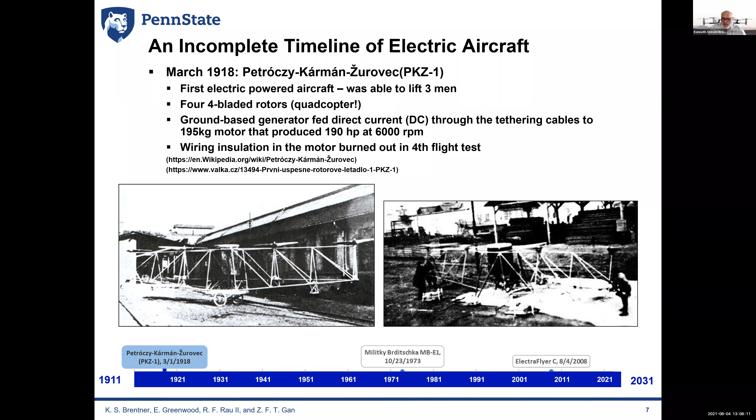The first electric aircraft was quite interesting to me. This is the correct picture for the PKZ-1. Theodore von Karman was there. This is the first electric aircraft. It was an observation craft to replace balloons. It was able to lift three men, and it was a quadcopter with four-bladed rotors. Here you can see them. I don't think it ever flew very high, but it flew four times. It had a 190 horsepower motor, and eventually that motor burned up, since they were trying to make it light. So it's kind of cool to me that the first electric aircraft was a quadcopter.

Now, it was quite a long time before any progress in electric aircraft was made. But in 1973 - I'm not going to try to pronounce these names, so I'll just call it the MB-E1 - this was a full-size manned aircraft, solely electric powered with nickel cadmium batteries at the time. It could fly up to 12 minutes, and in 2017 it was restored. Again, it was quite a long time before much else happened.

The next thing was in 2008 at Oshkosh, the ElectraFlyer C flew. In the press, I noted that it was titled 'Quietly Wows the Oshkosh Crowd.' This was an electric aircraft that had a battery which could be charged in as little as two hours, flew 70 miles an hour, up to two hours. So that was quite an achievement with this aircraft.

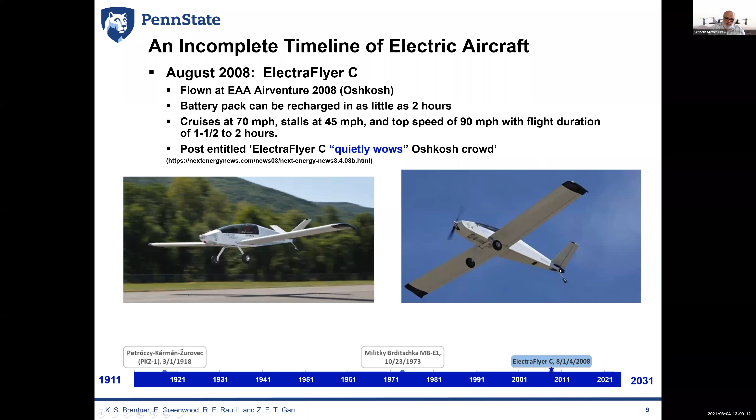But then I want to focus on the last decade. This is where really things start picking up, and you know there's going to be things happening. Remember that companies were starting to be founded, like Joby and Zee, just a little bit before 2011, which is what I'm showing here.

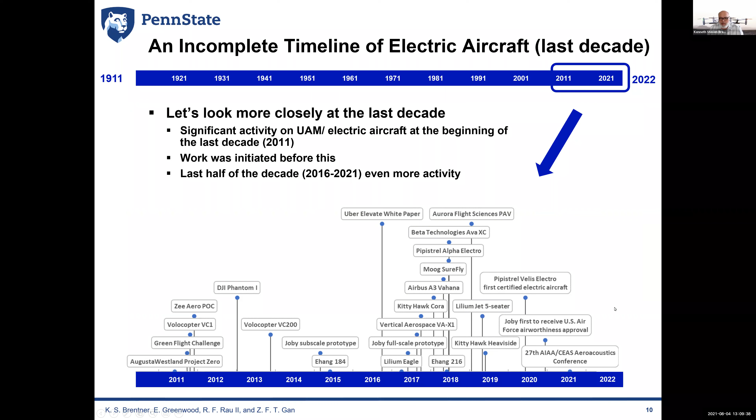So I want to look at these in more detail. Really, I would say AugustaWestland's Project Zero in June of 2011 was quite important. It was a hybrid tilt rotor lift fan aircraft, meant to demonstrate the technology. It wasn't intended to really fly, but it did hover, and it's the first electric tilt rotor aircraft. Very cool looking, an important milestone to make people start thinking about this.

Another very major milestone, I think, was in 2011, the Green Flight Challenge. It was sponsored by Google, and the requirements were for an aircraft to fly 200 miles in less than two hours, nonstop, using less than the equivalent of one gallon of fuel - so less energy. There were a couple of successful aircraft, but the first place winner was the Pipistrel Taurus, by Langelaan LLC. This is Jack Langelaan, one of my colleagues at Penn State. It would have been a Penn State aircraft, except Penn State didn't want to do the liability, so he formed his own company to do this. But it was quite an achievement for this aircraft, and really was looking forward.

403.5 passenger miles per gallon. They put two gliders together.

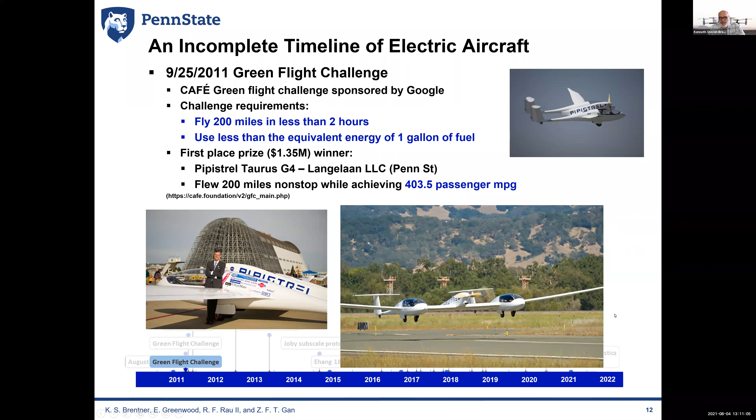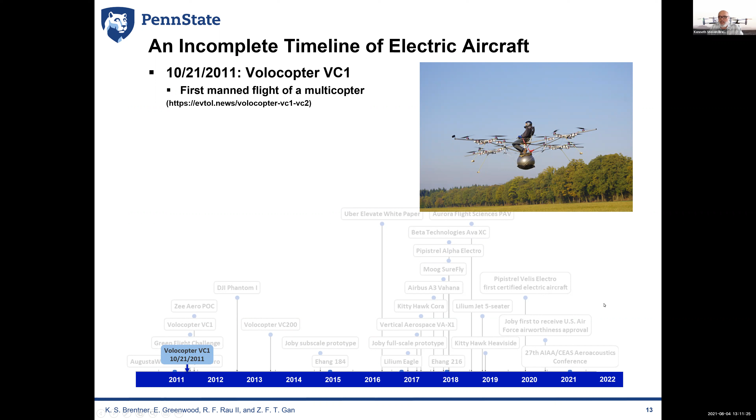Then just a few weeks later, the Volocopter had the first manned flight of a multi-copter. You've probably all seen this picture - quite impressive. Just to start, I love the exercise ball, or Pilates ball, used for cushion.

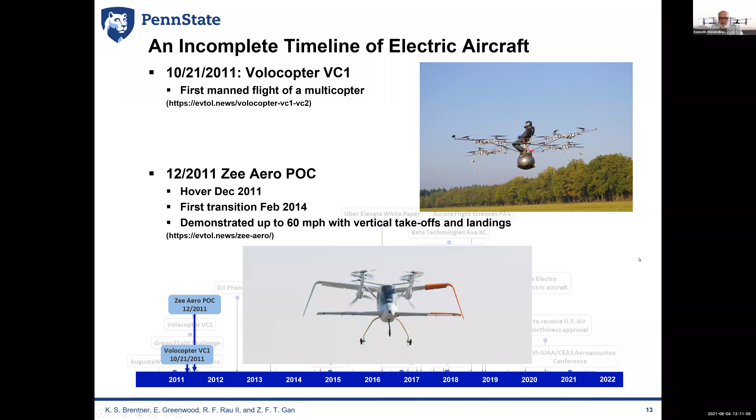Then just a few months later, Zee had the first flight of their proof of concept vehicle - Zee being Mark Moore's crew out of Stanford's... well, their company. This aircraft transitioned in 2014, and this eventually led to the Cora, Kitty Hawk. I know that they were using sophisticated tools even for noise back then.

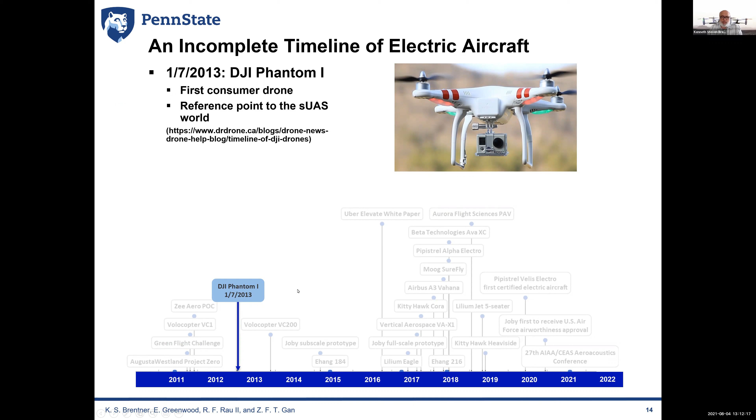Just as a reference point, I thought it was interesting that in the small UAS drone world, the DJI Phantom, which is quite famous, was the first consumer drone. That only happened in January of 2013, so that's not even been 10 years.

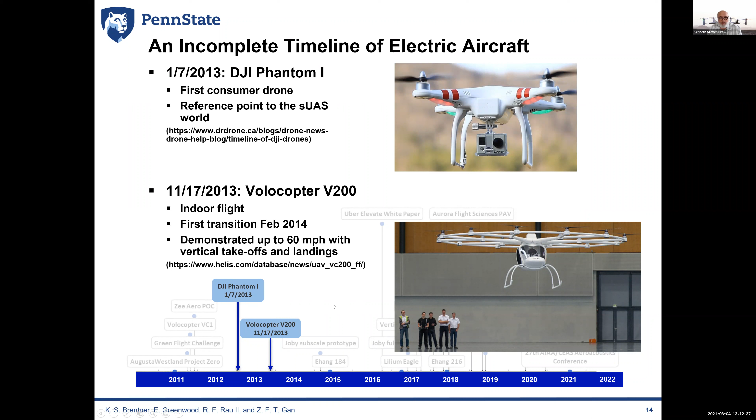Then later that year, towards the end, the first indoor flight of the Volocopter V200, which we recognize. It was flown inside, and it transitioned in February 2014 and can do 60 miles an hour with vertical takeoff and landing.

A few years later, Joby was testing their subscale prototype. Of course, no one knew about this at the time. Joby released this later, but here you can see it, and it's appropriately dark because they were very tight-lipped about what they were doing.

Same time period, EHang was flying their 184 with passengers. This 184 has 4 arms on it, so 8 rotors.

Then in 2016, almost a year later, a milestone I think was the Uber Elevate white paper. Uber started really, I'll call it evangelizing. Mark Moore, I would consider an evangelist, a strong technical person, and that was an important milestone for the whole industry in this movement.

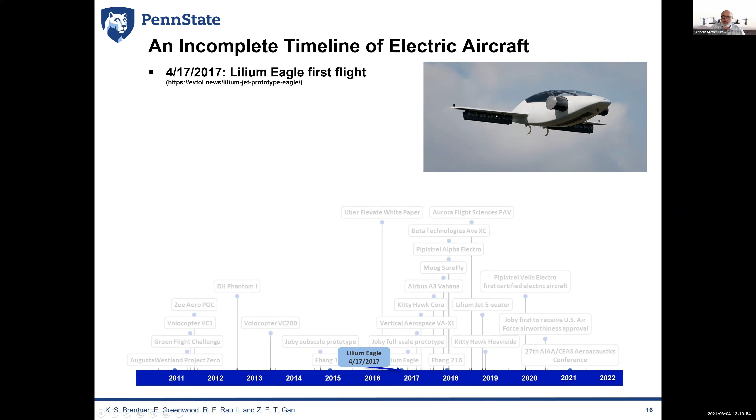So then Lilium enters the stage. They'd been working on stuff, and they had their first flight of their Eagle prototype. It's a smaller aircraft, starting to demonstrate their ducted fan idea.

In that time period, Kitty Hawk Cora, which proceeded from Zero, was in flight testing, I think in California, but mostly in New Zealand. And nobody knew about it.

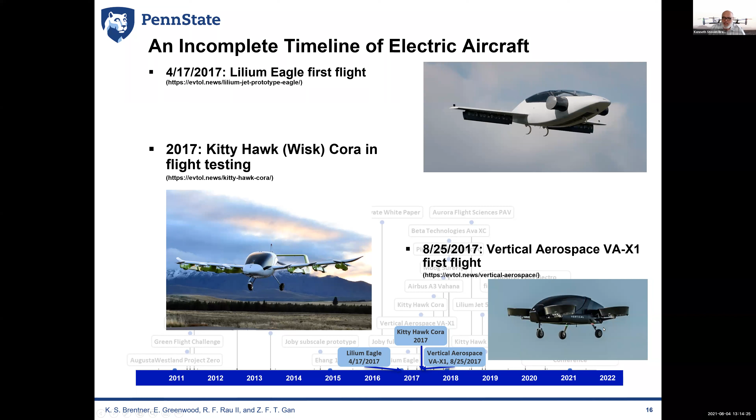Then across the pond in England, Vertical Aerospace was flying their first prototype of a ducted rotor system. And lots of activity starting up here in 2018.

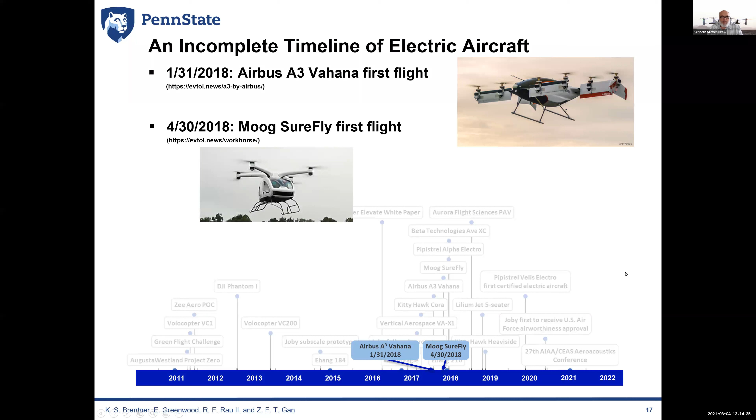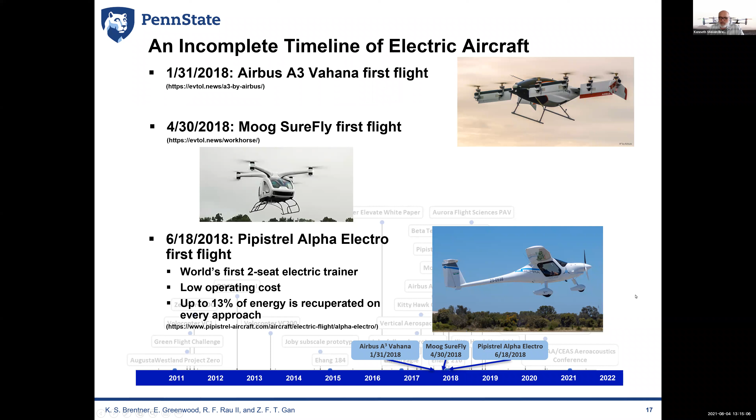Vahana had its first flight. The Moog, or it was Workhorse, the Surefly had its first flight. And then I put in another conventional aircraft I think is significant, the first flight of the Pipistrel Alpha Electro. This was a 2-seater trainer, providing low cost. I think it's quite interesting that it recovers 13% of the energy on every approach, so it could sustain the flight time.

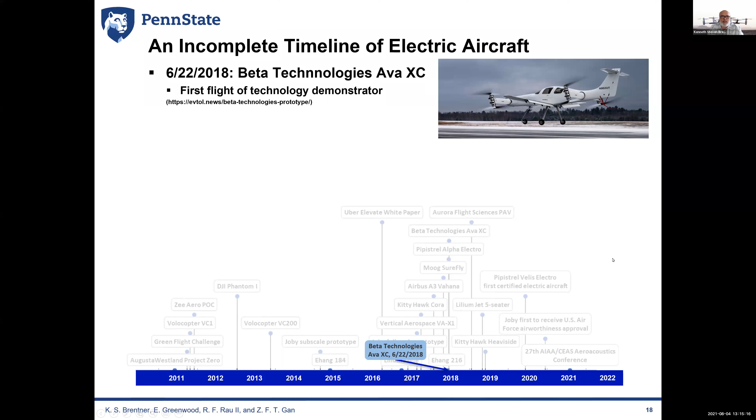Then in June of 2018, Beta Technologies flew their first demonstrator, the AVA-XC. The EHang 216, with 8 arms, 16 rotors, can travel 8.8 kilometers on a single trip, it says.

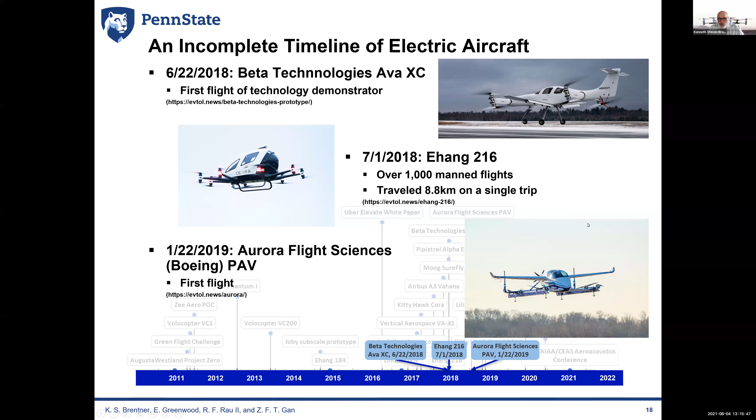Also at the beginning of 2019, the Aurora Flight Sciences PAV, personal air or passenger air vehicle, I forget—Boeing bought them. Then Lilium had a 5-seater that they tested in 2019, their first with all 36 ducted fans.

It was tested untethered. Kitty Hawk Heaviside—they've got a new vehicle that came out in 2019. They have over 237 successful transitions, 100 miles on a single charge, 180 miles per hour. Quite an efficient aircraft. Again, they were working towards low noise and claim 38 decibels in flight.

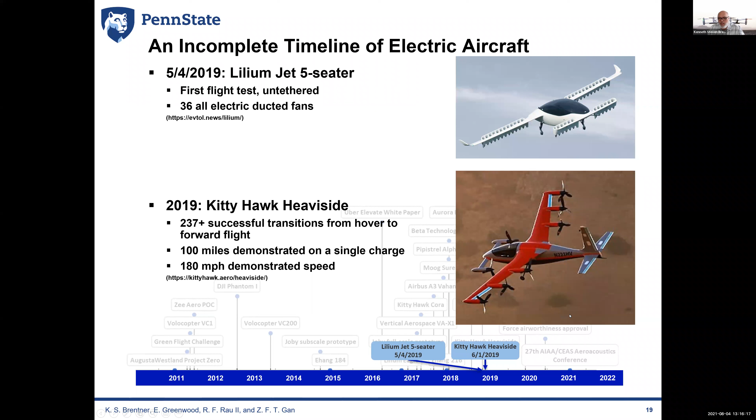Joby was the first to receive US Air Force airworthiness approval as part of Agility Prime. But Beta in May of this year, with their Hexa vehicle—lift aircraft—and Kitty Hawk Heaviside have all achieved this certification. And so that brings us up to the present.

I've included this Aeroacoustics conference today. So what do we learn from that?

Electric motors eliminate noise, but that wasn't really the problem, so just having electric motors is not good enough. Propellers are back, and lots of them. We know how to make low noise propellers, but there's some performance trade-offs. Let's be clear, propellers in edgewise flight are like helicopter rotors, or perhaps even worse, because if they don't have cyclic pitch, there's more unbalanced loading. So we have to take that into consideration.

The other observation I would say is there sure are a lot of different configurations. I've shown a variety, but there's more than that. So there are many opportunities for strong aerodynamic interactions, which is a challenge for us.

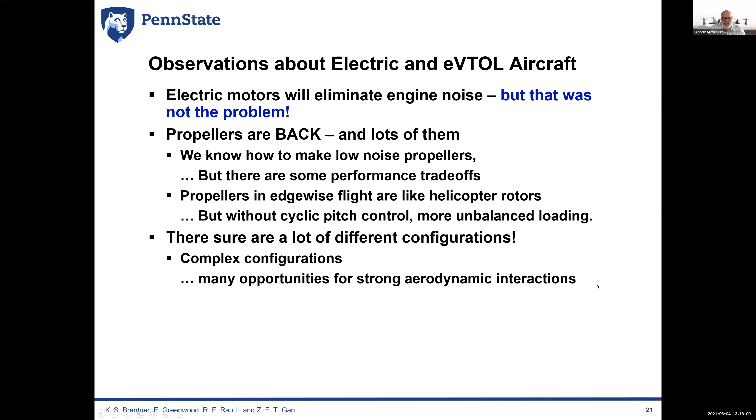Now I want to talk about propeller noise and rotor noise just a little bit to orient people not from a propeller rotor noise background. This is a taxonomy we've adapted from Tom Brooks and Schlinker's paper. I just want to note Tom Brooks right now—we'll be talking about the Brooks-Marcolini method, and Tom just recently passed away in the past few weeks, so I'd like to honor him as well. He was a giant in the field.

But anyway, we have thickness, loading, and high-speed impulsive noise. For helicopters, and for eVTOL aircraft, high-speed impulsive should not be an issue—most of the noise is going to be loading noise. We still have deterministic and non-deterministic noise, broken down into steady for low harmonic loading, unsteady and narrowband, broadband for propellers, and broadband noise typically for helicopters. We have these sources—I'll talk more in detail about most of them.

So the governing equation that's really applicable and widely used is the Ffowcs Williams-Hawkings equation. It's a rearrangement of the Navier-Stokes equations following Lighthill. We have a wave operator operating on acoustic pressure or density with three source terms.

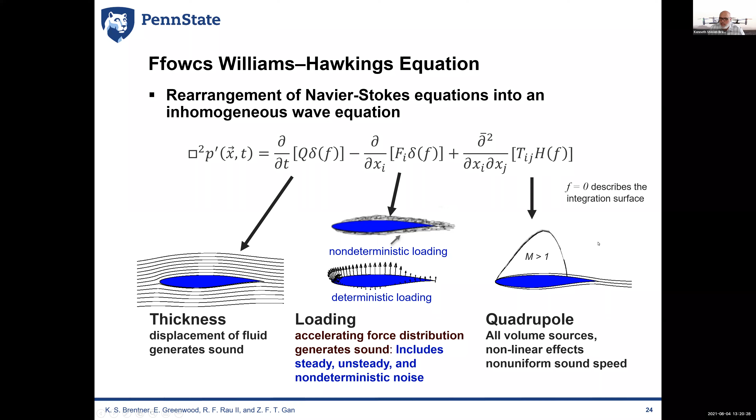I want to point out this loading source term also includes unsteady, non-deterministic sources, so broadband noise can be modeled by this term. Then we have the quadrupole term, which accounts for nonlinear propagation effects, non-uniform speed of sound, any actual sources like turbulence outside of the surface of the body, and we'll talk about that a little bit later. So we usually use Farassat's formulation 1A, and this will be the major equation in the paper.

I've highlighted different colored terms, because I don't want you to worry about the full equation. We have velocity and Mach number terms. These have to do only with the motion of the blade. So you can see the thickness noise only depends on those, and the distance, the R, distance to the observer.

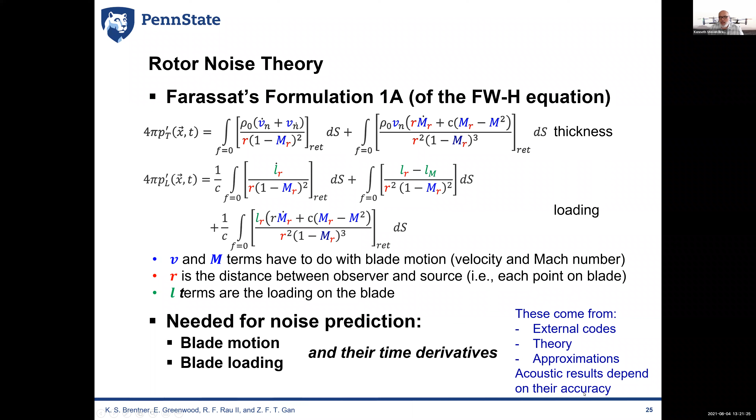In the loading term here, we have these green terms, which are the loading vector, and they are the loading on the blades. And I'll point out there's a time derivative of loading. So we need time derivative of loading and motion, and we get these things from external codes or theory or approximations. Of course, the accuracy of the inputs are important for the acoustics accuracy.

Now, the rotor environment for these vehicles is very complex, maybe more complex than helicopters, really it is. So if we have a lift plus cruise type of configuration here, you can see we have rotor-strut interaction, or empennage or wing wakes going into a propeller. We can have rotors close together that might interact with each other.

In this Vahana-like configuration, we have tilt rotors and wings. In fact, the propeller is going to have an interaction with the wing. It's going to cause unsteady airflow, so it's going to actually scatter the noise from the propellers, but also this unsteady loading is going to cause the wing to be a radiator too, potentially. And we can have rotor-airframe interaction. So we've got lots of potential interactions we have to deal with.

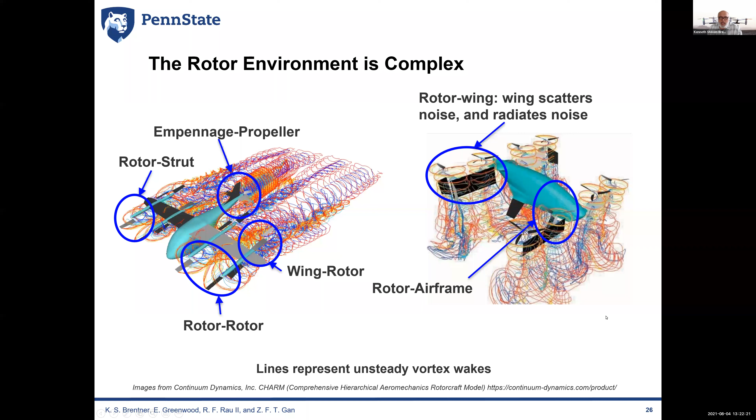Also, just like helicopters, we can have axial flight. For a helicopter, this would be hover, but if we have propellers, it just means axial flight. The velocity distribution is the same all the way around the propeller. It's essentially steady loading on the rotor blade.

But in edgewise flight, as we've drawn here, we have higher speeds on the advancing side of the rotor, lower speeds, a reverse flow region. For eVTOL with low tip speeds and forward flight, this could be a very high advance ratio in a large region that is in reverse flow.

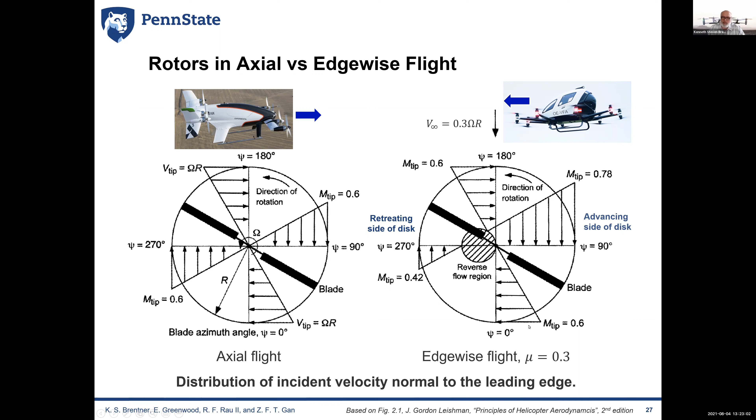Now that'll result in noise directivities, and we've just used a propeller here. In edgewise flight, just like a helicopter, we could have thickness and high speed impulsive noise primarily in front of the vehicle. With low tip speeds, we could probably get some behind too, because Doppler amplification won't be as important.

Broadband and loading noise radiated primarily above and below the rotors, but if we get blade vortex interaction, we get highly directional directivity from that interaction. But in axial flight, loading and broadband noise are going to be the dominant terms for us, and they can occur both above and below, or in front and behind the rotor, and in the plane, especially since these blades tend to be twisted more than helicopter rotors.

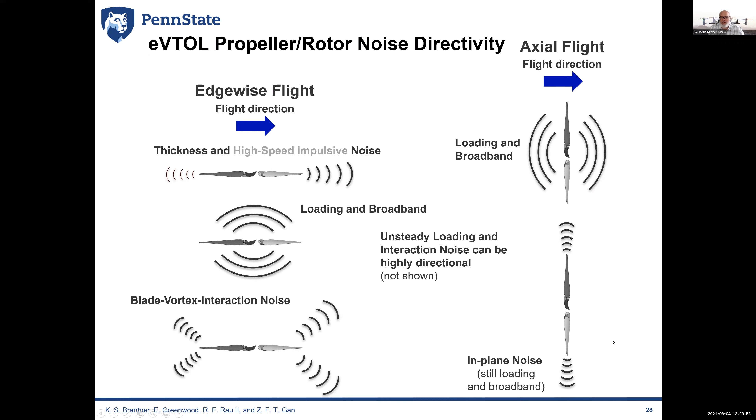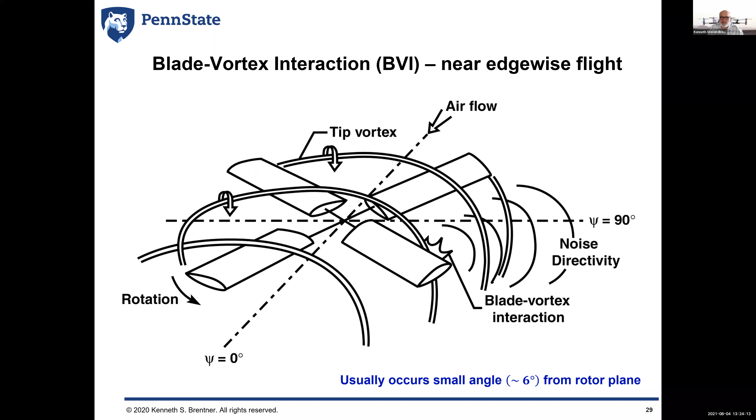Blade vortex interaction occurs in edgewise flight, typically when the rotor is at an angle of about 6 degrees from the rotor plane in descent, often, and we'll get highly directional noise. This is still important. We have to care about it on descent, especially in these aircraft.

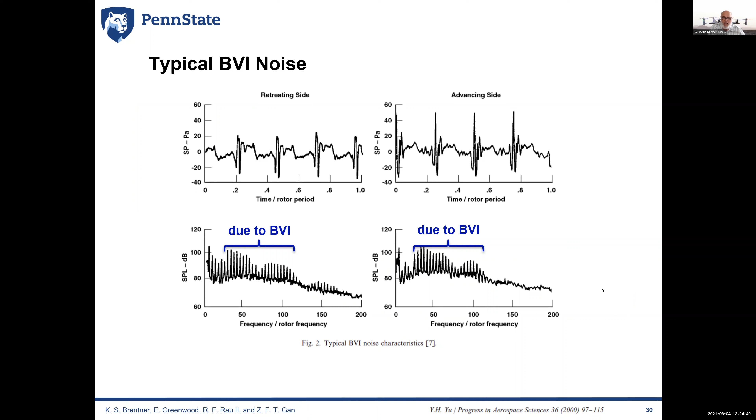This is a non-dimensional frequency. These are harmonics, and the higher harmonics are due to BVI. We can even get higher ones when we get into broadband noise sources. So BVI is important. It can be very annoying, but we can have other interactions that do something similar.

For example, in this recent test just published, it was in the 40 by 80. Stephenson led that, but there are a lot of other players you'll recognize here. I'm showing the case for a full wing, but they did a no-wing case, which is this rather sinusoidal type of noise, then the half wing, which stops in the middle, and the full wing. You see quite a different, higher amplitude, more harmonics involved, almost impulsive.

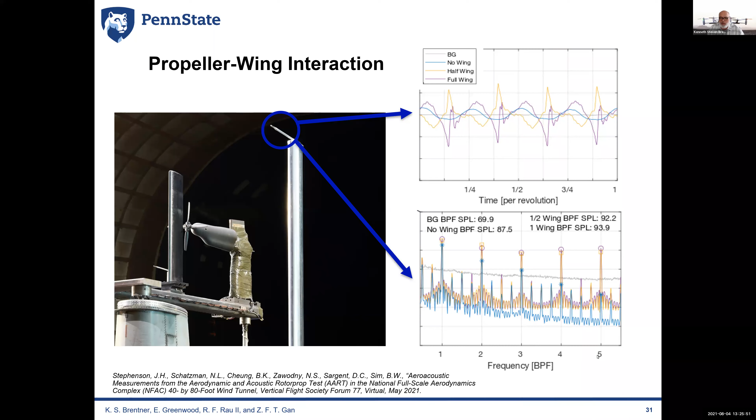If we look at the spectrum for those cases with the same color coding, the basic aircraft is blue, and it falls off very quickly. By the fourth harmonic it's quite low, but the BVI, or interference noise, stays quite high and continues for more harmonics. Another type of similar interaction would be a counter-rotating coaxial rotor.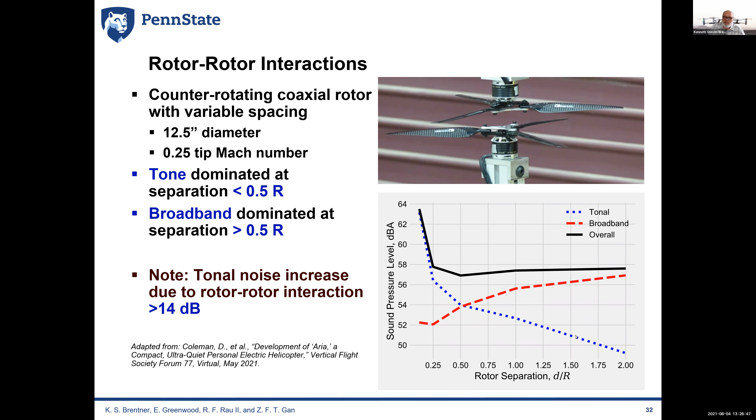But the broadband noise is different. It actually increases in this particular case as you get farther apart. So the total signal is a combination of the broadband noise and the tonal noise at different separation distances. There's probably a minimum here that you can achieve.

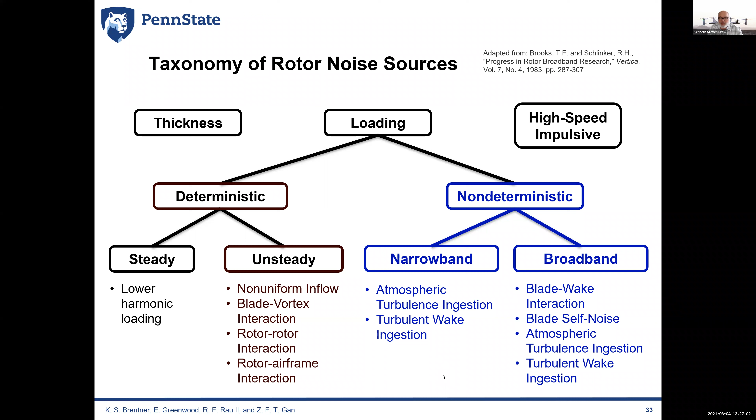So let's look more closely at this broadband, non-deterministic part we just introduced in that last figure. For propeller noise, going back to what's in Harvey Hubbard's book by Magliozzi, Hanson, and Amiet, they describe it as periodic,

narrowband random, and broadband noise. So these are really harmonic noise. This narrowband random noise is not quite periodic—it's really tonal in nature with a spread around the tones due to turbulence and other factors. And then we have random noise, where we really have all the frequencies involved. That's why we call it broadband noise.

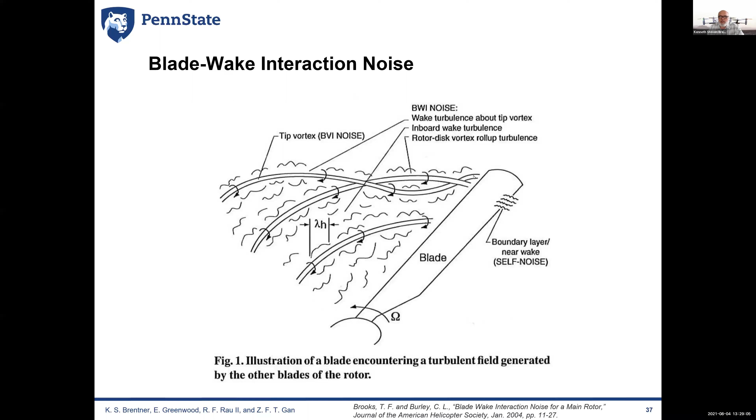Now, the blade-wake interaction is like blade-vortex interaction—it's related to the vortices, but it has to do with the turbulent field sort of entrapped or carried along by the tip vortices. Often it's in a more perpendicular orientation than for parallel BVI. So this wake turbulence and inboard turbulence all give another type of noise source we have to pay attention to.

I think it's especially important for eVTOL. Taking different people's results and merging them into one figure, we have a BVI kind of event and a BWI event—these are acoustic pressure versus non-dimensional time. You can see this is more of a broadband, random kind of signal on top of the BVI signal.

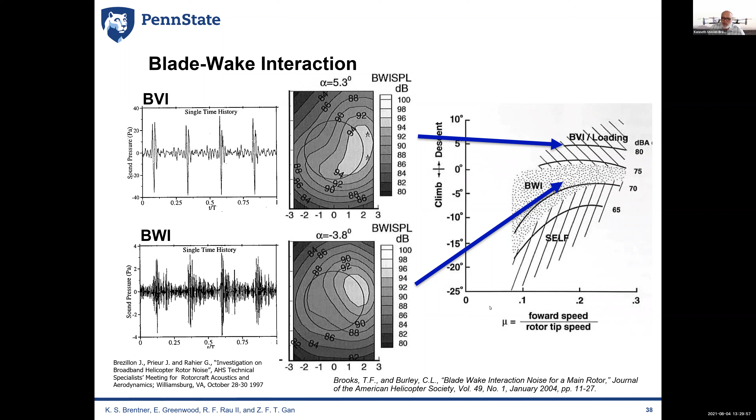And here are the directivities—this chart showed that self-noise is sort of important in strong, steep climb. BWI is more important in other climb conditions that are more benign, which is probably what we'll be flying. Then when we get into descent, the BVI and loading noise are most important. This has to do with the forward speed.

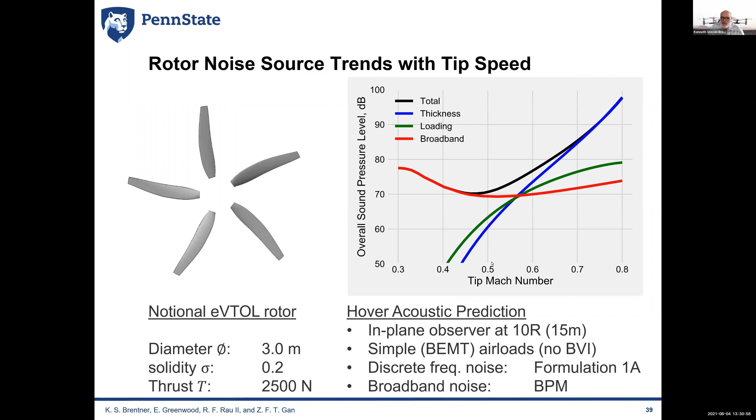Eric Greenwood ran a calculation setting up a notional eVTOL rotor. We wanted to show that if you look at overall sound pressure level versus tip Mach number, and these tip Mach numbers tend to be on the low side for helicopters, maybe a bit high for UAS, the thickness noise falls off very quickly at this in-plane observer. The loading noise falls off a little more slowly, and the broadband noise actually tends to increase with lowering tip Mach number. So you have a sweet spot depending on rotor configuration, a bucket between broadband noise and discrete frequency noise. That's something to consider, and I think we'll find this is the range where eVTOL wants to operate, and where current vehicles are operating.

So let's talk about some of the challenges and opportunities. I'm thinking from a noise prediction standpoint, but I want to look at the sources. For broadband noise, Ffowcs Williams and Hall's contribution to that paper isn't the only one from about the same time frame, within the same year.

Ffowcs Williams and Hall was really the first paper on trailing edge noise. They had a semi-infinite plate and used a Green's function approach. Amiet a bit later used a different approach and had the first influence of finite chord, using surface pressure distributions. Howe used the Green's function approach like Ffowcs Williams, but an alternate governing equation, and Howe had probably the first review paper talking about the different broadband trailing edge noise papers. These are theoretical formulations.

But Brooks, Pope, Marcolini, and several others focused on semi-empirical methods, and this was probably the dominant one. It's based upon Ffowcs Williams and Hall's theory, but then they used empirical measurements from a very extensive series on a 0012 airfoil. Very recently, and something we used in this presentation, was a review article by Sung-Kyu Lee and other esteemed authors in Progress in Aerospace Sciences this year. This is good if you're interested in trailing edge noise, you really should review it. But the idea is you get a U to the fifth kind of directive or power law for broadband trailing edge noise, which is lower than U to the sixth, which would be the surface sources, cardioid shape, and that's reproduced by several methods.

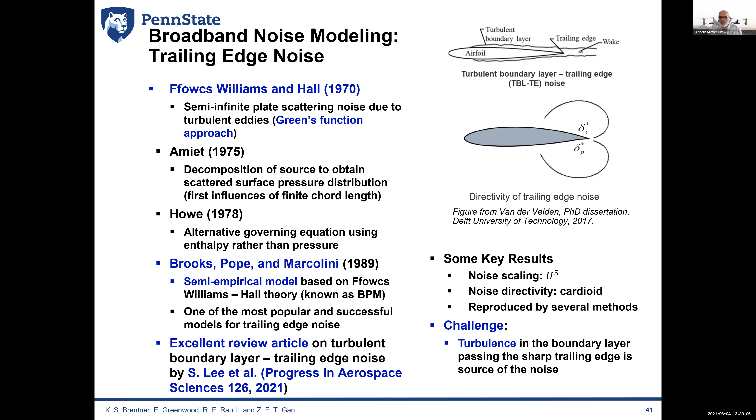So just a little bit more about Brooks, Pope, and Marcolini, their BPM method. It was physically based, they based their results on similarity spectra from all these NACA airfoil tests they did in the Quiet Flow Facility at Langley. This has been used widely for helicopters, UAM, and I should have put wind turbines on here. It's been extensively used and then modified for wind turbine use. It takes the steady flow conditions, and they get out a 1/3 octave sound pressure level.

For rotors, it's a blade element approach. Each element has noise generated on the blade, and there's some incoherent summation. It's been implemented in many tools. I'll just mention a few: NASA's BARC code, RotorNet before it, and NASA's ANOPP2 ASNIFM, which I think is due to come out, it's in use at NASA I believe. NREL has their FAST code for wind turbines, in which they use a modified version of Brooks, Pope, Marcolini. It's in PSU-WOPWOP, it's in lots of different tools, and it's been advanced.

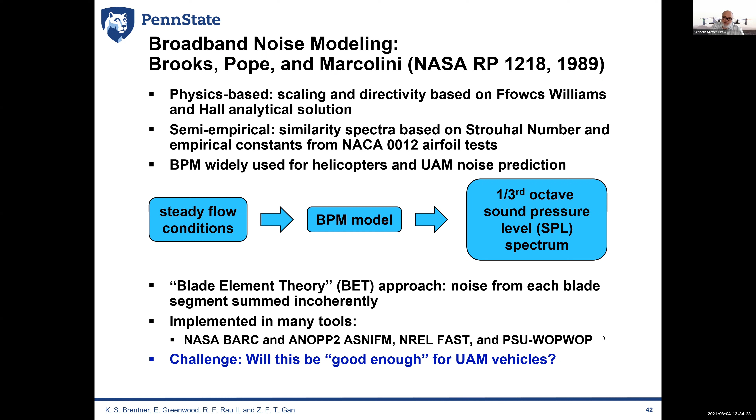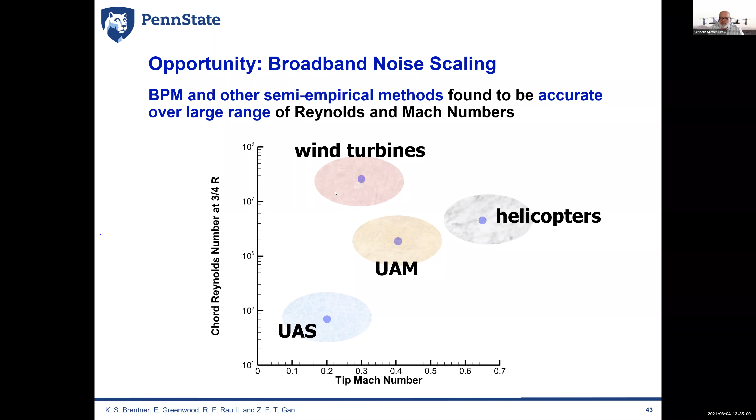So the challenge is, will this be good enough? We're using it, we're relying on it, but is it good enough? One thing that suggests yes, and we have been finding it useful, is that it's been demonstrated for UAS to be quite good, surprisingly, because this is really small scale and low Reynolds numbers. This is tip Mach number versus chord Reynolds number. We've used it extensively for helicopters, where it's very helpful and probably the best method we have there, at higher tip Mach numbers and higher Reynolds numbers. Then wind turbines, lower tip Mach numbers but very high Reynolds numbers. UAM, we believe, fits right in the middle with these Reynolds numbers and tip Mach numbers. So it gives us good reason that scaling should work fine.

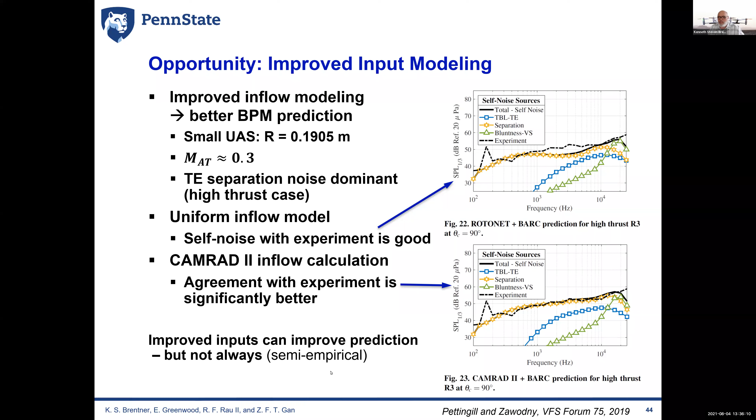So improved inputs really can improve the predictions, but this is a semi-empirical model. So if you improve just parts of it, you might not always get better improvement. That needs to be carefully studied in each case.

The other opportunity with trailing edge noise is passive noise reduction through things like serrations. Here are different serrations, porosity, these are foam. Serrations can reduce the span-wise correlation and hence the noise. Porosity can help if you have blunt trailing edges or delay vortex shedding. It can stabilize the flow and destroy span-wise coherence. Then you can use things like combs. So we have passive devices that we could possibly use.

I haven't seen much about this so far. People may have been working on this, but I know in helicopters at Penn State, Mark Maughmer's worked on developing airfoils for laminar flow on helicopter rotors. What if we could do laminar flow rotors for eVTOL in the various configurations? That would help potentially reduce our turbulent boundary layer noise.

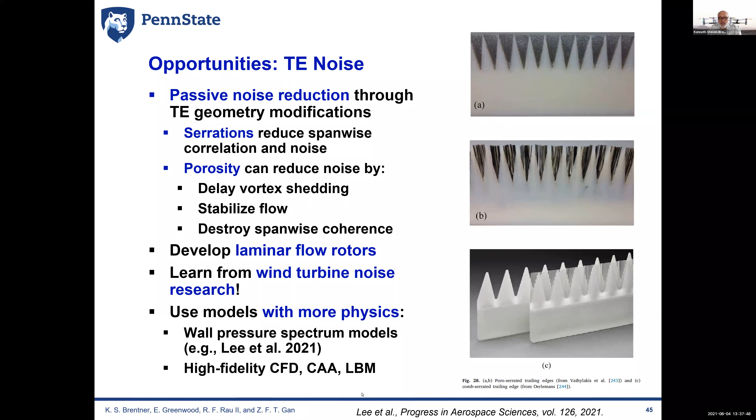Another thing I want to talk about, challenges and opportunities, is aircraft noise prediction. When I say aircraft noise prediction, I'm really thinking that this implies full vehicle flight simulation. We need to think about a flight simulation, which means we do the flight dynamics of the vehicle and the aerodynamics computed together. We need, if it's real time, a pilot or a pilot model to describe how the vehicle will likely fly. We need a model of the control system, because the control system and its gains can be very important for the noise.

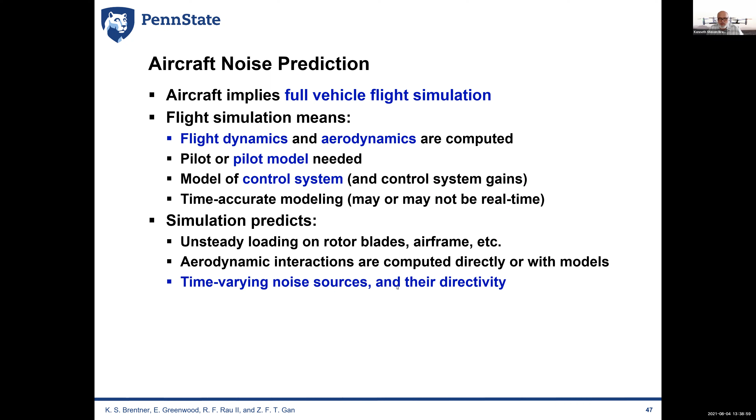This is something you get when you're doing a flight simulation and flying this, especially real time. It needs to be time accurate. It doesn't have to be real time for us to learn what the real aircraft is going to be like. Our simulation will predict the rotor loading, airframe loading, and we can compute the interactions with that. Then we can do the time varying noise sources and their directivity. So this is quite important.

In helicopters, we've been doing this recently with a code, PSU Helisim, which is flight simulation, and then the CHARM rotor module, coupled to PSU-WOPWOP. This was an example from Mrinali Botre's PhD dissertation for a Bell 407.

This is a 6-degree descent. We did the flight test, that's the blue line. There's the nominal conditions. It was supposed to be flying at 0 degrees roll, a certain pitch angle, 0 degrees yaw. But in actual flight, it doesn't follow that exactly. Even the velocity is not quite steady on the descent. So we actually tried to simulate that with our pilot model to get as close to the flight test as we could. It didn't quite match here. I think this is not the best Mrinali did.

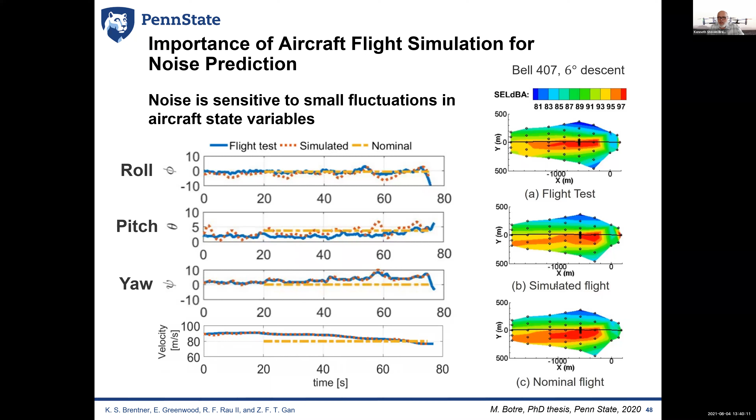But what you can see, here's the flight test. This is sound exposure level on the ground. Then there was the simulated flight and the nominal flight. The simulated and nominal probably bracket the flight test, neither one quite right, but you can see even with these rather small variations, we get a substantial difference in the noise prediction. So we really need to account for that.

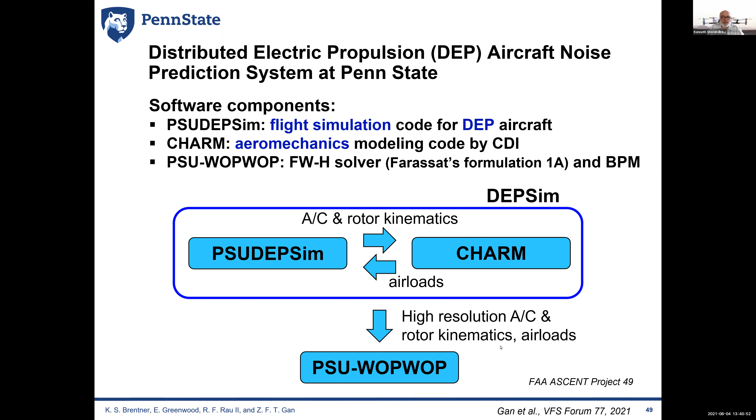So we're working on that at Penn State on a new system we call a distributed electric propulsion aircraft noise prediction system, DEPSIM, and the flight simulation is PSU DEPSIM. For distributed electric motors, it has to handle electric motors, lots of rotors, and other control surfaces and ways to control the aircraft. It's a non-unique trim. Then we take the high resolution output from CHARM loading and put that into PSU-WOPWOP along with the rotor kinematics, and we predict the noise. I'll show you examples from that in a little bit.

But one of the things important with UAM is we have non-unique trim of the aircraft because we have many different rotors. We have interactional aerodynamics. They can be flown lots of ways, and we have non-unique control. It's over actuated, so we can have continuously varying RPM that can be used for control, in fact, or variable pitch for control, other control surfaces. We think most UAM noise analysis probably focuses on a steady condition and looks at the geometry. But an opportunity is asking the question, what control strategies can we use to minimize noise? And certainly we've done this with tilt rotors in the past.

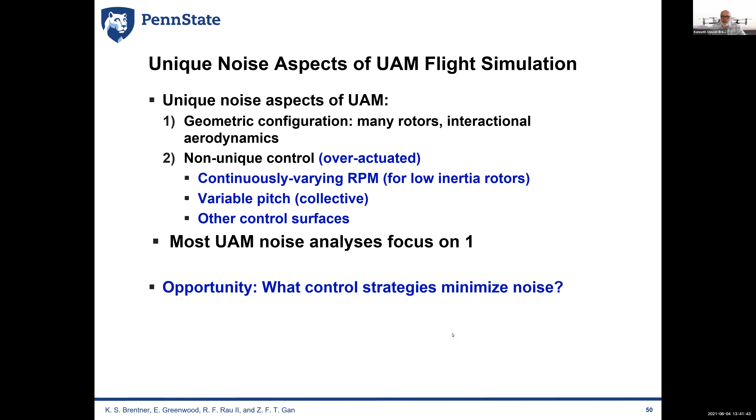For an example, in our forum paper this year, we said, well, let's look at a DEP, a lift plus cruise configuration.

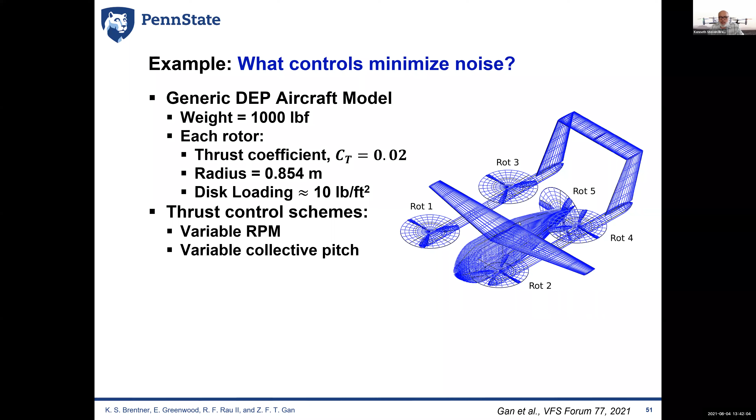And we can have two thrust schemes: variable RPM for each of the rotors, or variable collective pitch. We're going to look at a simple maneuver in low speed flight, a controlled doublet. Let's look at the roll doublet. We're going to roll about 5 degrees in one direction for 4 seconds, then go back 5 degrees the other direction. We'll do that with variable pitch and variable RPM using our PSU DEPSIM coupled system.

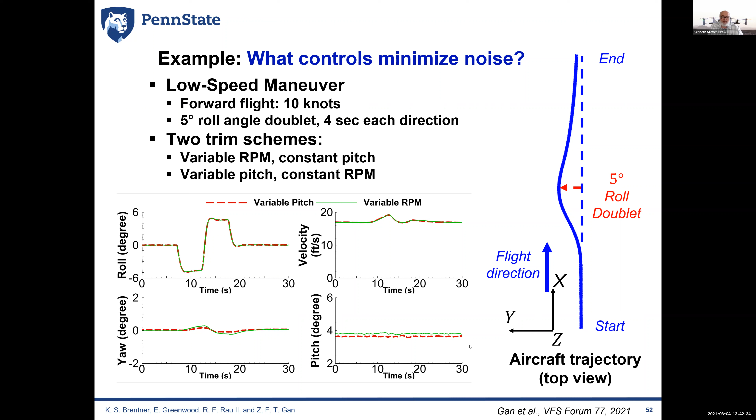Now, you can see both methods give us essentially the same flight profile for this roll doublet. This is just our first case of trying to look at this kind of thing. But if we look here, here is the variable RPM, and here is the variable collective pitch.

This is the case for variable RPM, and I want to focus your attention on the blue and black dashed lines. These are both in the plane of the rotor, in front and in back. You can see during the maneuver we have quite a big change in the loading noise, with spikes from the initiation of the start of the roll, the stop, and again the starting of it the other direction and the stop. We see that in both cases.

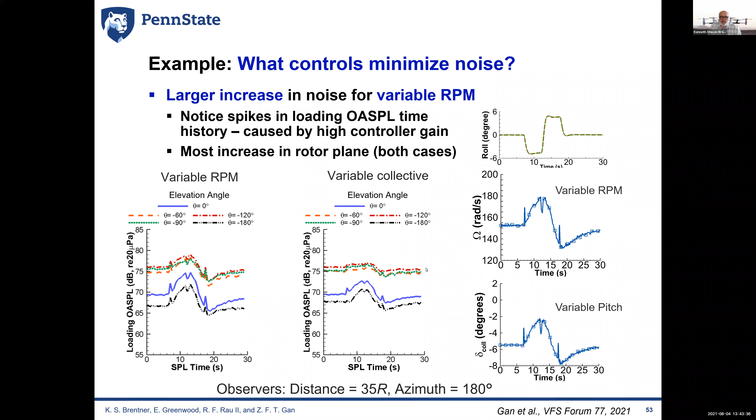Out of plane, the difference is not so big, but for this variable collective case, we see smaller variations in noise, especially out of plane, using this control procedure. So this is a first look at this.

Now we think human perception of eVTOL noise is very important too, and there's a lot more I could have included, but I wanted to put this in here. For helicopters, John Leverton and Pike, and then later Vandenberg and others, have pointed out that there are non-acoustic factors that can be quite important. John called it virtual noise.

So helicopter noise perception depends on things like safety. Do people believe this aircraft is safe? If they don't, they'll rate it as noisy. Are they worried about their privacy, about people flying over and invading their privacy? If so, they'll complain about noise. And if they think the economic importance isn't there, if it's just rich people flying over their homes, then it's noisy. If it's going off to the oil rigs with their husbands and sons working, then it's considered less noisy.

They have the same type of perception issues for wind turbines. If it's economically important, or people care about the green aspect, it's considered less noisy, but the visual appeal can matter too. If people say it's ugly, they'll say it's also noisy, or complain about shadows going across them. So these perception issues that aren't directly noise related influence the perception of noise.

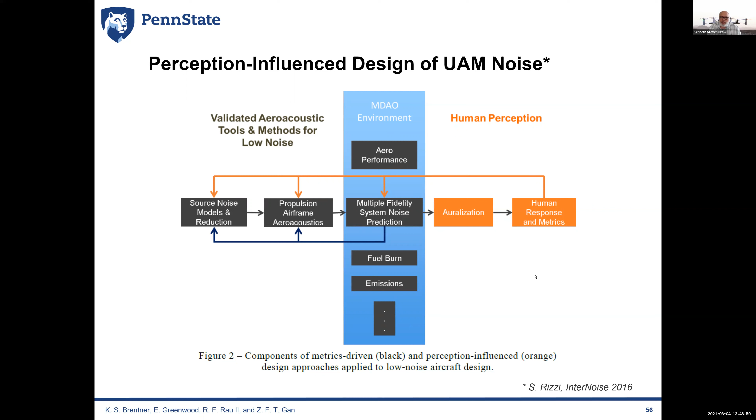An example, this is for a UAS, of how listening can be important. This is a test where they measured car noise and small UAS or drone noise. You can see the sound exposure level on the bottom, A-weighted, and the annoyance on the axis here. Generally, the black is UAS, the drone, the blue is the car. If you look at it, it's about a 5.5 to 5.6 dB penalty for drones; they're considered noisier at the same level. So levels alone don't capture perception.

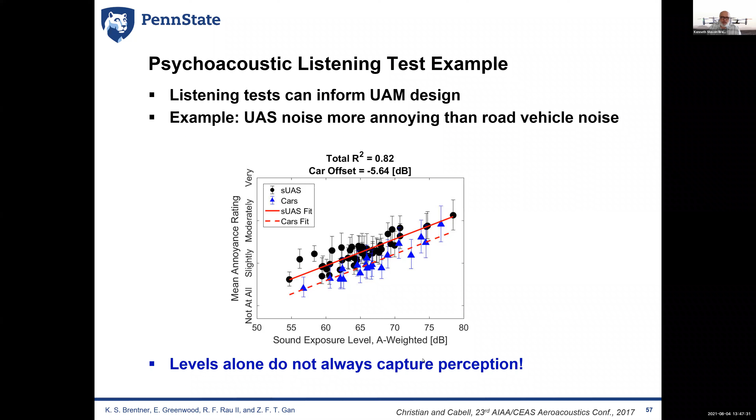For example, variable rotor speed could be an issue. It can be used for primary control, not only in UAS, but UAM, some vehicles. Some studies have shown that continuous variation in RPM may affect the noise levels. That seems obvious, especially if it's rapid changes, perhaps. But it also changes the perception of the noise. You have a time variation in the noise that you can see in spectrograms.

And RPM change, we found in our recent paper, probably doesn't change much over one rotor period for UAM-sized vehicles with larger rotors. This introduces the idea, can we model some of this as quasi-steady? It would certainly give us a prediction speed advantage. So we should accept, one opportunity is to look at this more in the future. Can we assume it's periodic? The variation remains almost constant over a period. It's still periodic. It could be used for fast predictions, but it won't fully account for interactions.

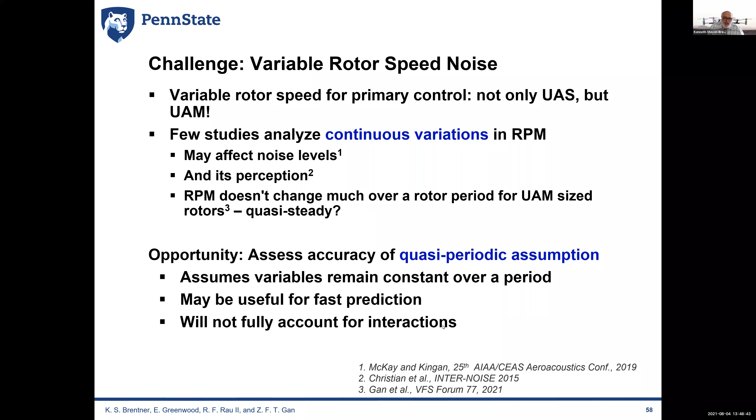So then moving on, I just don't have time to talk about the other things more. I want to talk about high fidelity simulations. They have an important role as we go forward and a big opportunity in my mind.

So why would we want to use high fidelity? Well, we need to do it to capture the unsteady loading, especially in interactions. And we need to do it, we think it's important for broadband, non-deterministic noise. So we needed to capture turbulent boundary layers, blade-wake interaction, other kinds of interactions. And these are challenging. They really require cutting-edge CFD techniques like large eddy simulation, detached eddy simulation.

LES has really been increasing in adoption over the past 5 years. We want to use that here. Another alternative, I would say, is lattice-Boltzmann methods. We've seen results for UAMs using lattice-Boltzmann, certainly with PowerFlow and other tools.

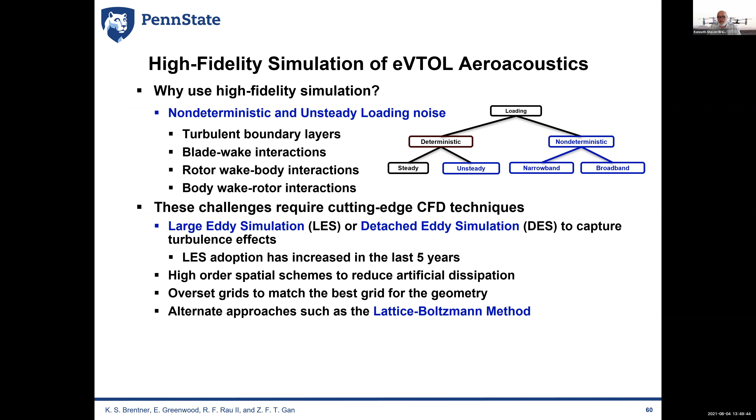So how good are we now with the current CFD-based approaches? Well, here's an example from a few years ago for a quadcopter sort of model. Uses PSU WOPWOP for the Ffowcs Williams-Hawkings solver and Helios for the CFD. And you can see they can model this with and without the body around the aircraft for rotors. And they're getting some interesting noise. We don't know how good it compares because we don't have an experiment for this. But you can see differences with and without the body.

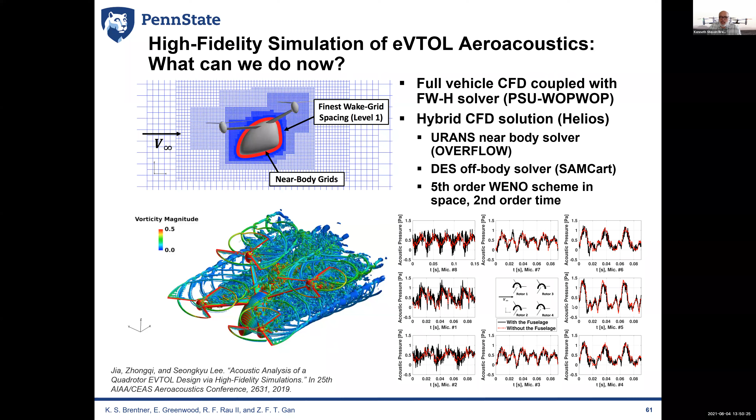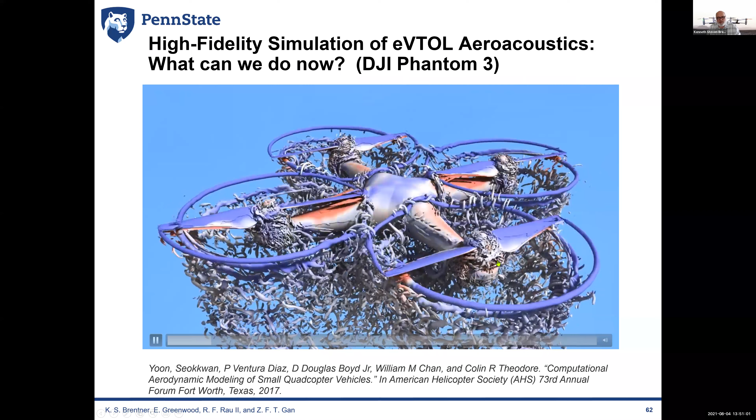So a question is, where did direct computational aeroacoustics go when we think about these vehicles? By that, we mean sort of CFD-like, but high resolution to capture the acoustics too. Well, long propagation distances are very expensive. That's something we still can't do. The other thing is things like nonlinear disturbance equations require a coupled simulation of bulk flow and acoustics. And in my experience, these have been a little bit disappointing. And another thing is we need these type of methods when we have very strong flow acoustic interactions, especially like jets, high-speed jets, and other things. We don't think that's probably needed for eVTOL, and we think we have to watch that, but that's a reason we can decouple and use hybrid methods.

So the CFD-to-acoustics, what I've just shown a little bit, this is the most common where we use the pressure, the loading vectors or pressure on the surface when the quadrupole or the off-body terms have minimal impact. But permeable surface is still something people are working with. We can capture the volumetric corrections or noise sources, and it includes nonlinear flow effects or non-uniform flow effects where the acoustics has to propagate through it, at least in the region.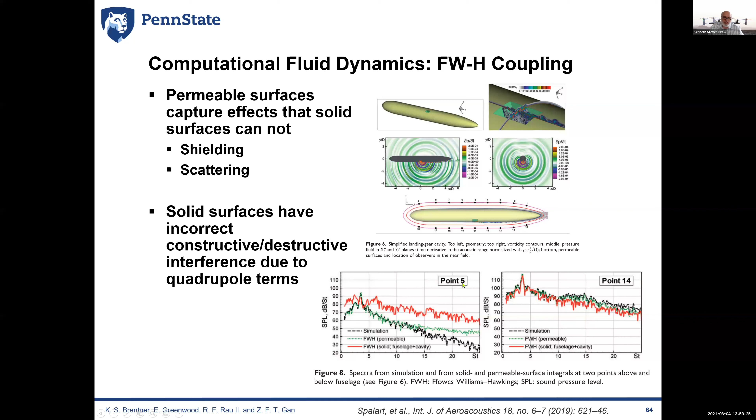We know this, and I've done work like this, other people have too. Len Lopes and his colleagues worked on this problem with a vortex ring going inside a permeable surface to outside. It shouldn't really generate noise inside the volume when it's inside, nor when it's outside, but as it passes through, since they neglected the quadrupole term, there's noise.

These are different time segments. This is a cross-section of the acoustic pressure inside the volume. You can see it's nearly zero here, but as the vortex gets closer to the surface, in these three time steps, you see higher levels. As it goes outside at 7.7, it gets lower, and then it goes back to something nearly zero.

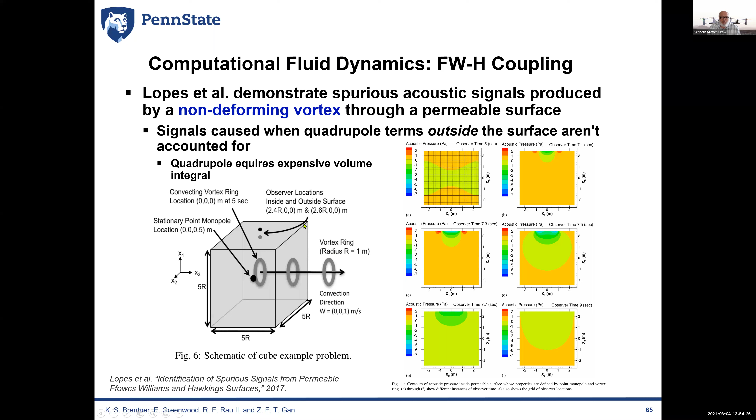So these spurious signals are a problem with this. People have tried and have had some success, but I don't think we've fully solved that problem yet.

Then an alternative method we've seen used, I think has importance here, is the lattice-Boltzmann method. I don't want to go into all the details, but they use a different governing equation. They calculate with a collision operator that they use. They have various states, and it actually has particle distributions only travel in characteristic directions. So as opposed to traditional Navier-Stokes, each state can be captured by purely local operations.

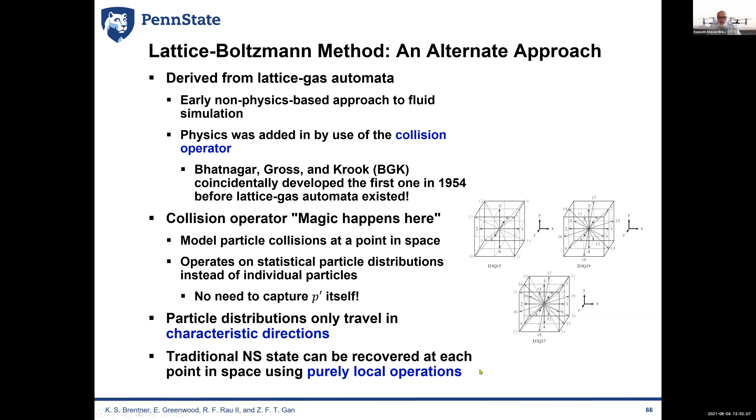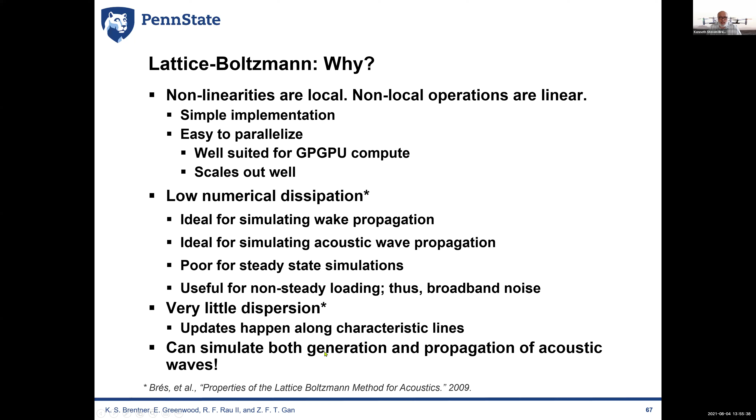So what does that do for us? Why would we use this? Well, the nonlinearities are local, the non-local operations are linear. So it's simple to implement, easy to parallelize, and well suited for GPU computing, we think, and it scales out to massively parallel quite well. It has low numerical dissipation, low dispersion, and we know those things are important for acoustics, and it can generate both the generation of sound and the propagation of those acoustic waves.

Here's an example for the DJI Phantom 3 rotor. This was a PowerFLOW study, I think from Thurman et al. You can see the experimental results are in red and the PowerFLOW results here. This is in plane, this is out of plane, and it's even better out of plane. At the highest frequencies, it doesn't agree as well, and what they found with the grid refinement study was that as they improve the grid resolution, they're able to capture the higher frequencies better and better.

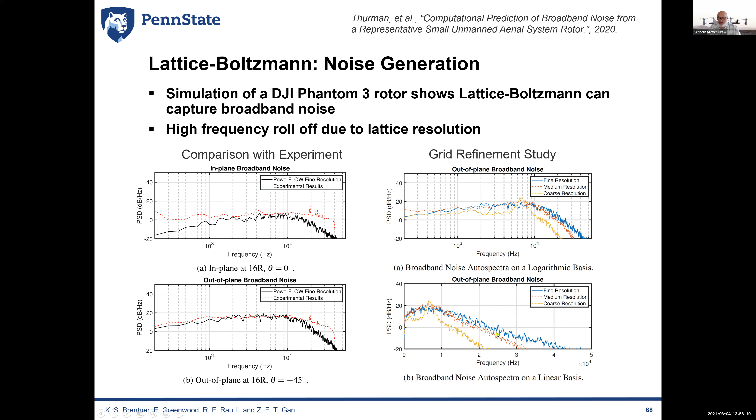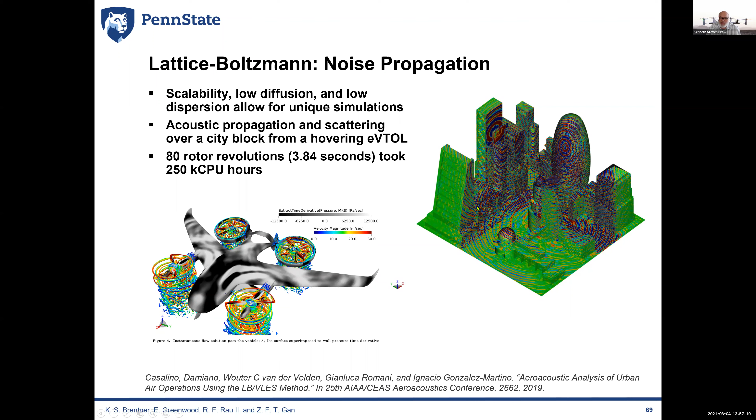Here's another example of lattice-Boltzmann. This is actually kind of a cute example, and I think it really shows what we'd like to be able to do. Damiano Casalino presented this a couple of years ago at the Aeroacoustics Conference in Delft. Here they did a scattering over a city block for an eVTOL vehicle in hover. They did 80 revolutions, about a little less than 3.84 physical seconds of time, and this took 250,000 CPU hours. They probably had a lot of CPUs to do this. If you have 10,000 CPUs, it'd be 25 hours of wall clock time. But this is what we'd like to be able to do, and we probably need to be able to do this in urban environments like this.

So now I'd like to wrap up. This is a brief view of what we think should go forward in the future, some opportunities and challenges together.

We think low noise design tools are very important, like our PSU DepSim coupled system with PSU-WOPWOP. We need to improve, and we want to continue to improve broadband noise models, pressure spectrum modeling, like UCD's QuietFly, and other models probably are good, but we also need mixed fidelity models.

So low fidelity for wake transport we think would be good, with a near body solver to handle the wake interactions. That way we think we can reduce the computational domain of CFD with hybrid methods, and use cheap methods far away for propagation and transport, and then high fidelity methods, maybe lattice-Boltzmann, in the wake region where interactions are occurring.

We also think that not only the vehicles in the future, but the methods themselves need to be acoustically aware for design tools. We want results in minutes, not hours, weeks or days when we do flight simulation. And we probably have to look at variable RPM. Is this important for the noise generation? We've already started to look at it with simple methods, but does this change the broadband noise, for example, due to acceleration effects? We don't think the acceleration is high, but we've got to look at that more.

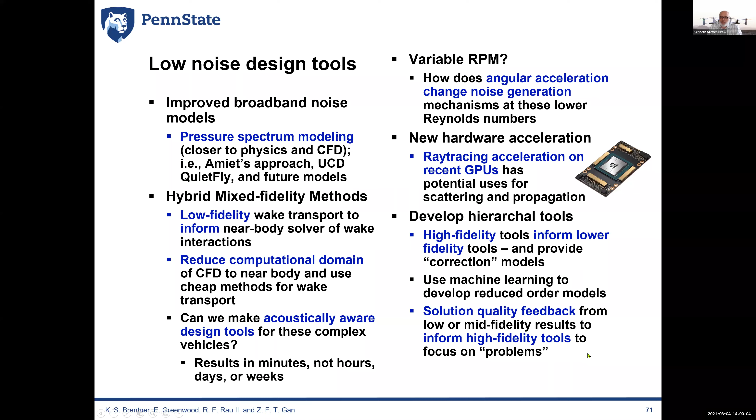Noise measurements is another opportunity we think is exciting, and it's really coming online. We need, of course, noise measurements for validation of tools, certification, and community impact. But there are several activities that are about to give us much more noise measurements.

We're working at Penn State on several FAA projects. One of them is Project ASCENT, Project 27, that Eric is managing and I'm working on. They're measuring noise from Beta's aircraft, in-flight and static measurements. That's done already. We also have a whole series of reconfigurable drones that we can fly at a local mid-state airport, and they're doing noise testing of these now to help us understand multi-rotor vehicles.

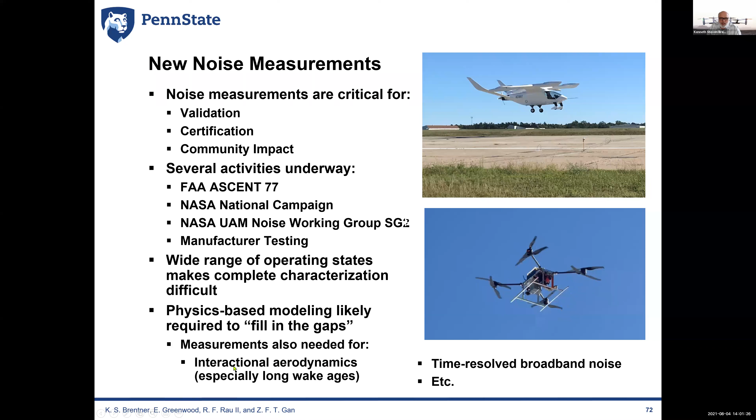Then we're also doing physics-based modeling. We think it's going to be necessary to fill in the gaps, so we need a coupling of the measurements with the prediction tools, because there are so many operational situations and so many different vehicle configurations that we can consider. But we also need measurements. I kind of put it as an afterthought here, but for aerodynamics, especially long wake ages, the interactions are important.

Finally, we think acoustically aware aircraft are going to be useful in the future and are needed. Effectively, we need noise abatement procedures, but we think that if you can do real-time noise modeling, then the aircraft can become aware of the sound it's outputting at any given time, based upon weather, flight conditions, and the importance to the community at that time. So we think these aircraft will adapt their configuration, flight dynamics and controls, and have on-the-fly flight path planning and replanning. But especially the control system needs to be aware in advance of certain things it shouldn't do because it will raise the noise.

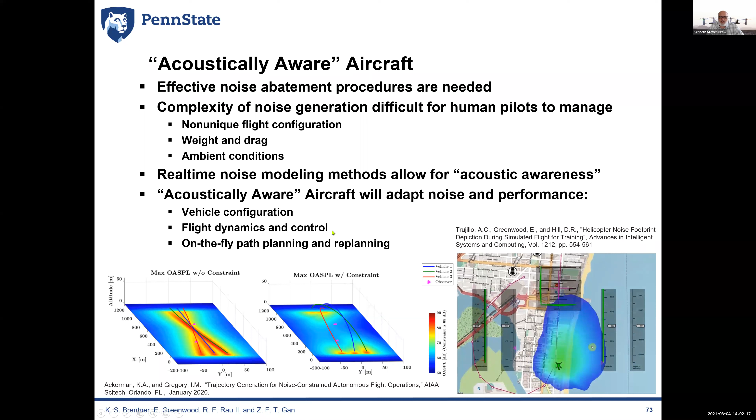So I went a little bit over an hour, but just one more slide, the conclusion. I think there are really many challenges for eVTOL, urban air mobility, advanced air mobility, whatever you want to call it—it's viability and acceptance. And I want to put here, even though this is a noise talk, safety always has to be first. We can't do anything that makes the vehicle not safe, and these vehicles won't survive if they're not perceived as safe, and also to the people on the ground.

Economic viability, obviously, is very important. These can't survive if they're not economically viable. But then the noise is important—it's right up there with these. The companies recognize that, I think. And the noise has to be different from helicopters or different from drones. And of course, infrastructure is a big challenge too. All of these things are being looked at, but there's a lot more to go, and I think even the second generation of vehicles will have more effect on it.

Now, the good news is I think the leading developers, the ones I can get enough information about to make some sense of—and there's been recent articles, Sean Captain had a nice article on fastcompany.com—where he was able to find the rotor tip speeds are probably between 0.5 and 0.2 for the current vehicles. He estimates the disc loading around 12 pounds per square foot, which is right in the range for helicopters, a little bit higher than light helicopters. And Joby and Kitty Hawk are estimated to be in that range.